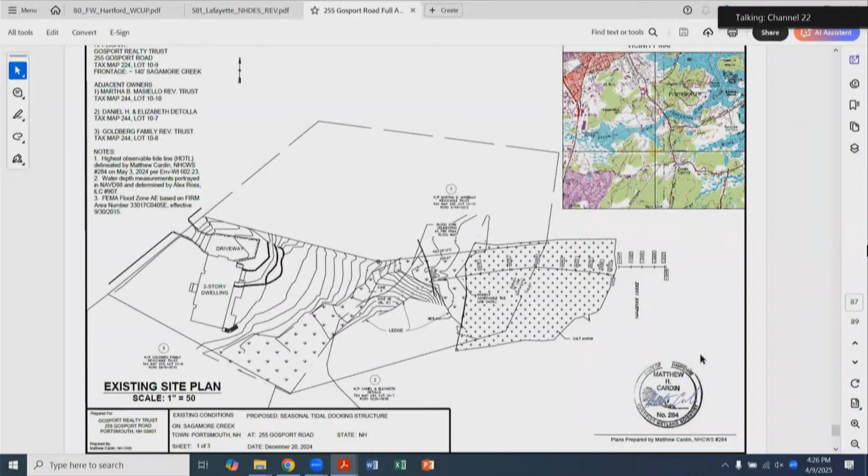Okay, everybody hear me okay? All right, good afternoon, my name is Matt Cardin. I'm an environmental consultant working on behalf of the property owner at 255 Gosport Road. This is for a standard dredge and fill major wetland permit application for a tidal dock located at the property. The property fronts Sagamore Creek as one of the properties in Gosport. There's currently no dock or any type of wharf at the property, so this is a new application for a wharf. The proposal is for a 6 by 200 foot permanent pier connected to a seasonal 30 by 4 gangway, connected to a 10 by 40 float on float stops or skids, and there'll also be a 15 foot by 6 foot ramp accessing the pier.

So the major wetland permit application is for impacts to freshwater wetlands and tidal wetlands on the property, and there's also a waiver request for the overall length of the structure. DES in their standard design rules limits the overall length of a structure to 200 feet. This goes beyond that in order to reach navigable water for the use of the pier.

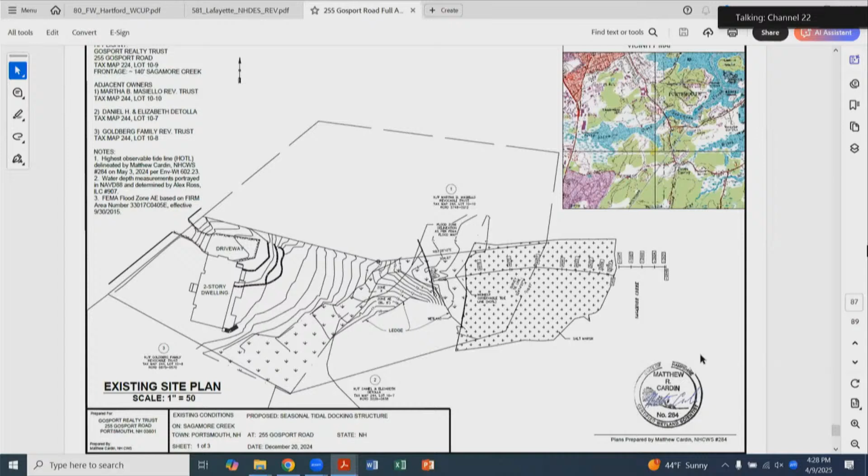So just going over some impact numbers. There's a proposal for impact to the tidal buffer of 55 square feet, a permanent impact to freshwater wetlands in the amount of 247 square feet, and a permanent tidal wetland impact of 969 square feet, plus a seasonal impact with the gangway and the float totaling 620 square feet. So that's in total 1,836 square feet of wetland impact, both fresh and tidal including the seasonal parts, and then 55 square feet of buffer impact.

To go over in detail - you're on the next page, beautiful. So the property has an existing dwelling on it. It's a typical backyard, maintained lawn, and then it slopes down to where the freshwater wetland and the tidal marsh extend from the property boundary out to Sagamore Creek. You'll see on the bottom left-hand corner there's a wetland drainage swale that crosses the property line, and then that freshwater wetland drains into the tidal portion.

So that's why there's impacts to both freshwater and tidal wetland, because from where the start of the pier is on an upland area, it traverses over a freshwater wetland portion, and then towards a tidal portion, where the highest observable tide line was delineated. It's fairly diffuse - there was no topographic change. It was really mostly based off of wrack line and vegetation species specific to a tidal marsh.

So you can see there's a rock wall there shown - that's essentially where the start of pier is. To the left side of that is the access ramp, and that lands on a bona fide upland tidal buffer. Then that ramp will get to the pier, and the pier extends 200 feet to the salt marsh, and then there's a gangway, and the gangway extends past the leading edge of the salt marsh down into the mud flat, where there'll be a float. There you go, that's a much better depiction of it.

There's a total of 34 permanent piles that'll support the pier.

As far as construction goes, access will be solely from the water. So all materials and equipment will be via barge, staged out, floated in during high tide, staged out beyond the salt marsh proper in the mud flat on spuds, and then equipment and matting will be placed - or matting first, where the dock will be, the pier - and then equipment will be traversed along that matting, and used to drive the piles.

It'll be sort of a boardwalk for construction workers to place the stringers. Once the stringers are on, everybody will be working on top of the superstructure to lay the decking and the rails and everything like that. So the goal is to get in there, drive the piles, put the stringers on as quick as possible, and then pull the matting out, and work will be done all from the decking of the superstructure.

The seasonal components will be floated in or brought in by barge and lifted and hoisted into place. So the gangway, 30 by 4, will be placed pre-assembled off-site and then placed in once the superstructure is built, and the same with the floats. Whether the floats be on float piles or on skids or kind of stilts is to be determined. I like to keep that up to the contractor, but potentially getting input from DES on that. It's written up both ways - shown here with float piles or float stops.

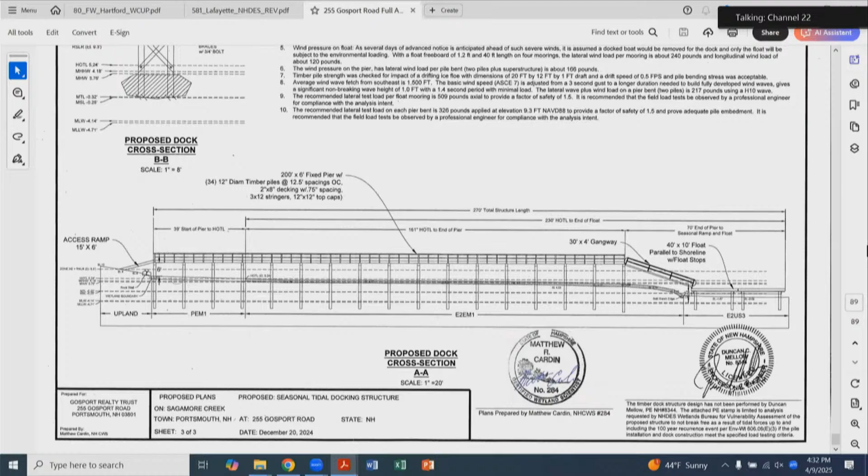Some other details of the application - going through the requirements of coordination between the Port Authority. We have a letter in the application from the Port Authority saying there's no adverse navigability impacts with the proposal. Additionally, there's correspondence from the Natural Heritage Bureau in there. So there were no hits from Fish and Game, but there were a number of rare species that came up in the Natural Heritage Bureau report, so there was correspondence back and forth with Maddie on that.

That's the microphone.

And there were some natural communities: high and low salt marsh, intertidal flat, and salt marsh systems. And then there were also 5 endangered species listed, so there was correspondence back and forth.

There was a survey done by myself out there looking at glasswort, marsh elder, and a total of 4 species, including salt marsh agalinis, a flower, and tundra alkali grass. The agalinis was determined, from my assessment, to be known to occur in salt pans, and there's really none where the impact area is. It's pretty thickly vegetated with different types of spartina and glasswort on the leading edge.

And then the alkali grass - talking to Maddie about it, there's a historic presence about a half a mile away. Describing the site to her, she felt pretty confident it's unlikely to be at that site. So I think we've done solid due diligence reviewing for rare and endangered species, and Maddie's feedback was to try to reduce the overall impact on the salt marsh, which I've attempted to do in the design.

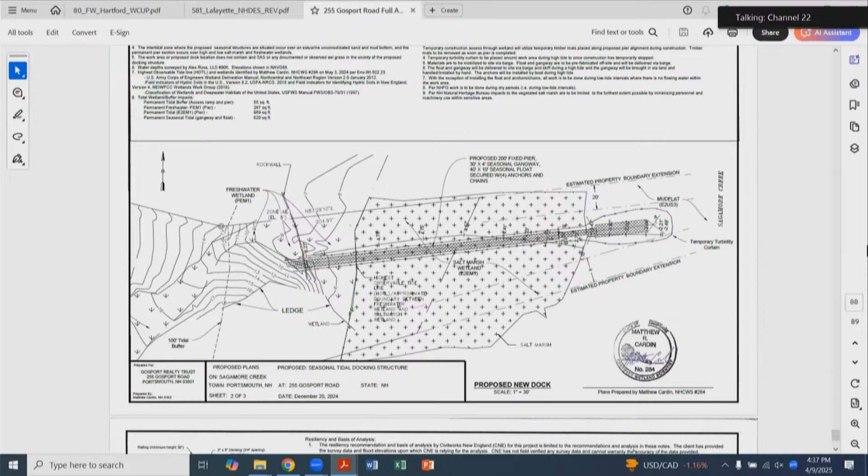I wonder if you could just talk a little bit about how this dock is going to be used. This is just a single family - what kind of activities do they anticipate doing on it, and how are they going to get down there? Just talk a little more about the use.

Sure, single family lot - a single family currently owns it, with young kids, a fairly young family. Permanent, full-time residents - yes, a local family.

The anticipation, from what I understand, is to have a boat down there and be able to access the water. They have a technically waterfront lot, and I think they're relatively new to town, so they haven't had too many seasons down there, but they have visions of bringing their kids down and being along the water. This is a means of getting them past the salt marsh, in an elevated sense, down to the water where they could access a relatively small boat. In terms of getting down there, there's sort of a footpath already to get to the salt marsh area, but nothing official.

Right now, the footpath kind of goes through the skinniest part of where the wetland swale is, and it's shown as a jurisdictional wetland. It's really more of a drainage conveyance. There's not a lot of wetland characteristics in terms of typical wetland plants, organic soil, and very poorly drained soil. It's not so much that, it's more of a conveyance, but it wasn't so much a stream, it was more of a wetland, so that's why it's shown as such.

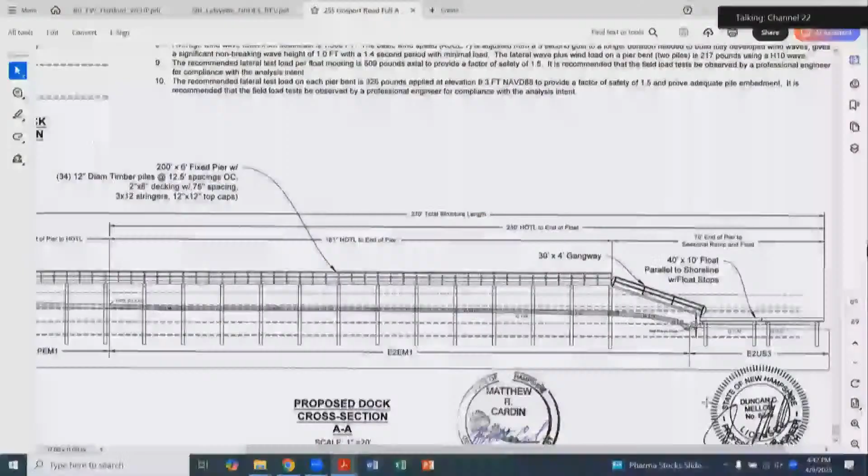Having a smaller float wouldn't eliminate the need for the waiver. No, but having the longer one doesn't get you out into any deeper water. Correct. But it does allow more boats to be moored there. You'd have 2 slips, almost 4 slips, since most boats are 20-ish feet. A slip technically is 25 feet according to the rules, so almost 4. Yeah, you're maximizing the allowable use of the structure by having a larger float. You could put more vessels, one on each side, possibly fit 2 on one side. But yeah, you are maximizing the use you get out of it.

And at this point, you don't know what size boat they're going to put there? No, it's going to be limited... I shouldn't say anything, this is sort of my opinion, but I don't know.

My concern about the size of the float is about the possibility or the need for other boats to come up there, because we've seen it happen, and I live by the water. Someone says 'Oh, I don't have a mooring, can I be on your float?' And then it becomes a permanent thing, and 3 boats end up being there permanently.

Can you say that again? So you're saying other people in the area come nearby? Friends will ask, 'Oh, you have a dock, can I moor my boat there? Because I don't have a mooring.'

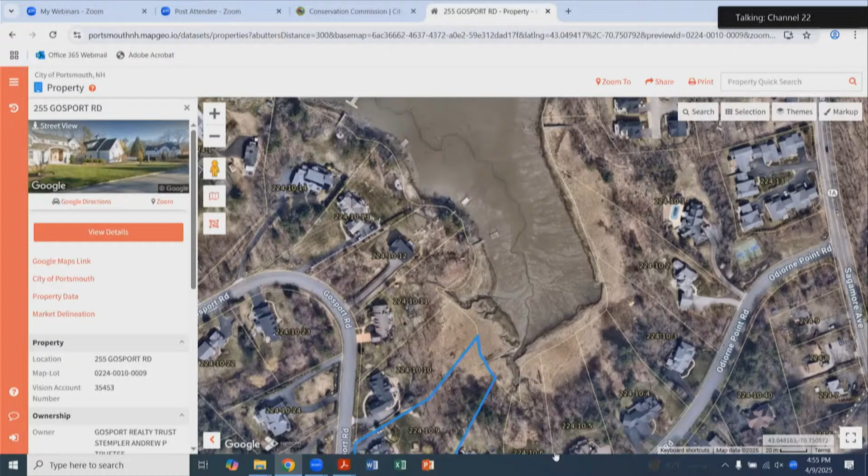Matt, I had a question about what you said about the access and the hours of access. Did you analyze or figure out what would the access be if the dock was 200 feet or shorter? How many hours compared to the 16 hours, I think you said?

Well, where the floats are to get to the mudflat portion, which is really the navigable portion of the water body, we can't move it any more in, we're as far out as we can go. It's a substantial area, and once you get to the mudflat, it's relatively flat, so moving it further out, or even bringing it in by a foot or two, isn't going to make much difference. Like any typical salt marsh, you have the vegetated portion, and then there's a pretty abrupt drop down to the mudflat, and the proposed floats are just offset from that transition.

So moving that isn't going to change it much. And then I tried to get the longest gangway I could without running the risk of the gangway hitting the mudflat, to try to reduce the amount of pier. So within reason, you want a little bit of space because of some tolerances there, but I've tried to make the pier as short as possible by getting to a float that's as tight to the mudflat as possible, generally trying to reduce the overall length of it, given the site constraints that we have.

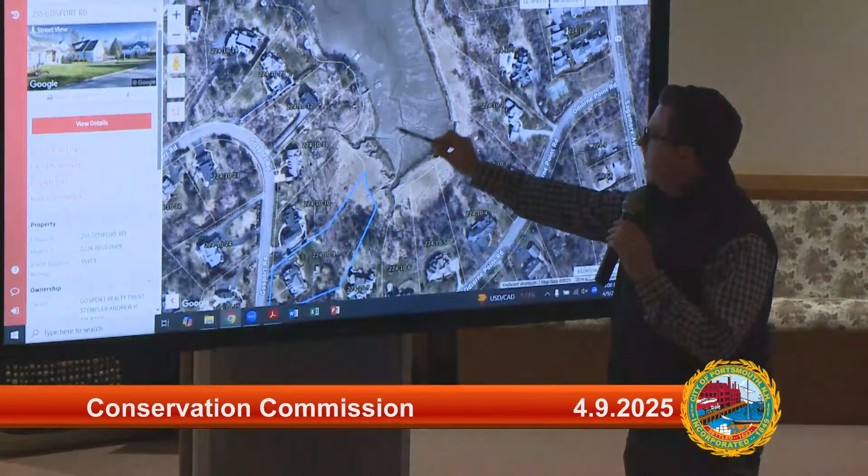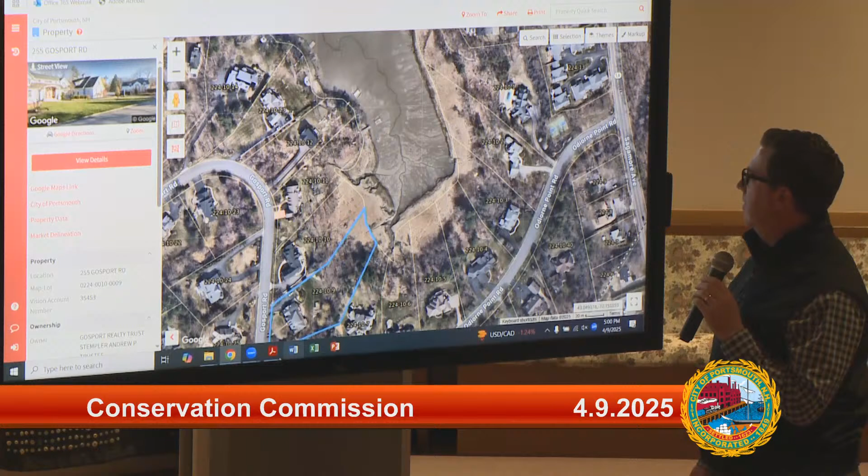This is our property. This extends generally this way, this extends that way, and then this extends out here and out here, and eventually they all do converge. But where we're proposing the float, generally somewhere here, they don't converge. If you go back to the plan—here's the property boundary, here's the 20-foot setback. Where they do converge is far out in space here. So that ended up not being an issue, but I certainly respected the comment.

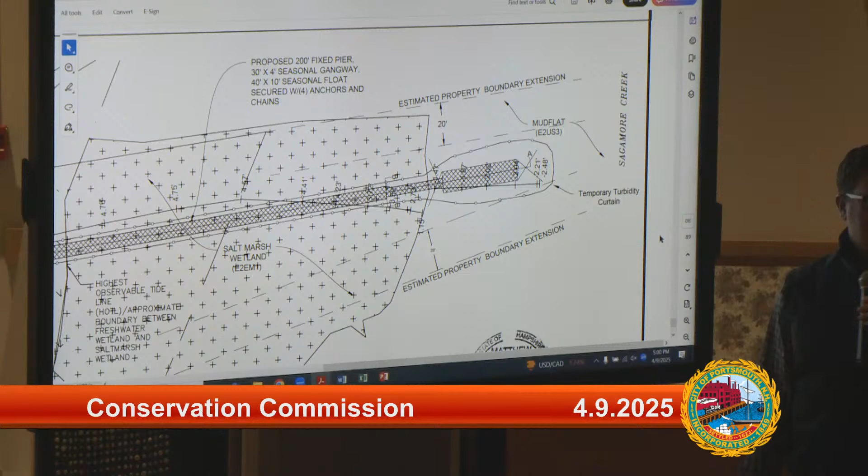Okay, thank you. Yep.

Obviously this is extending well beyond their property boundary. I actually don't know who owns that marsh—is that city, is that state? You see their boundary does not go all the way to the water's edge. I don't know—can you provide some insight? So it's generally owned by the public.

There are a couple of things happening. For waterfront property owners, the State of New Hampshire generally has a charter agreement giving waterfront property owners a right to wharf for properties with frontage on public water. But through that process and DES's rules, they acknowledge it's considered public property, which is why they have these design standards. A further level is you go through the PDA, Port Authority, and they weigh in on its impacts and effects on navigability. There are other rules in DES's regs addressing potential impacts on public navigability—like you can't have a sheer wall, it has to have piers and allow flow if somebody needed to pass through for safety reasons.

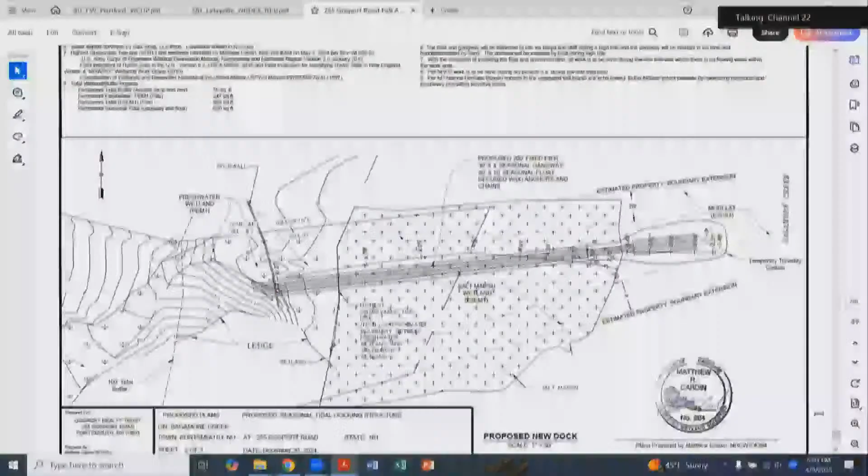Just to make sure I'm reading this correctly, the orientation of the dock is basically east-west, right? If you scroll up—yeah, north is up, so yeah. I think it's worth noting a north-south orientation minimizes the amount of shading underneath the dock, which, obviously you were constrained here on what you could do, but it's worth noting as one of the downsides of this particular design.

Yeah, you can see we didn't have a lot of flexibility—even if we had that option, it would have been a great point to consider, but the design constraints are pretty tight in terms of how far you have to go to get to navigable water, and your latitude within the property. You can move within those 20-foot setbacks, but that requires getting an abutter sign-off, which I don't know would have been an issue, but it didn't seem advantageous to go one way or the other in this case.

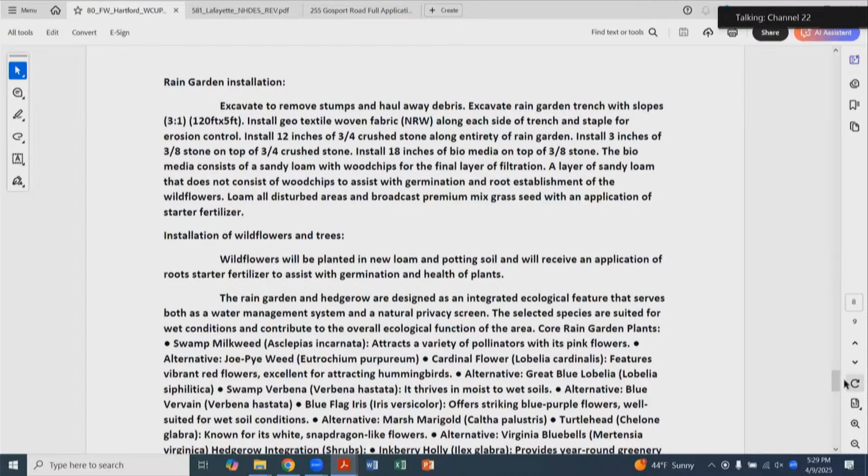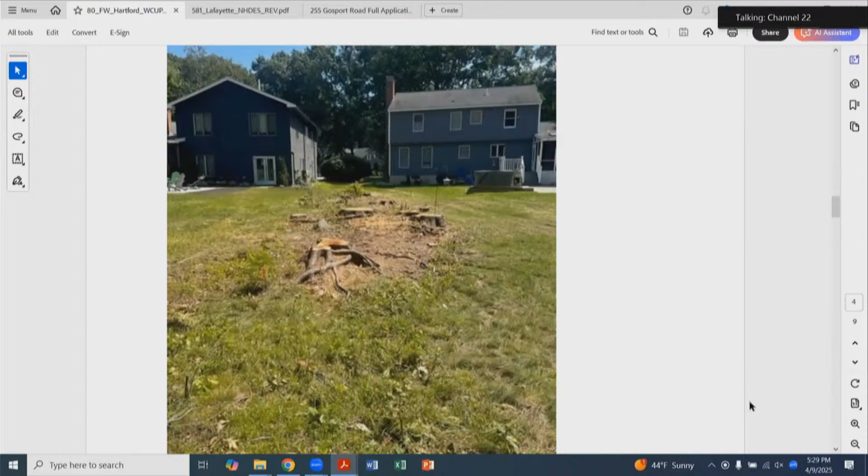So we took down, like I said, 4 trees. You all can do math - obviously that's a lot more than 4. This is tied into our neighbor, Ash, at 90 FW Hartford.

And kind of where this got a little sideways is, so obviously you can see aesthetically not pleasing whatsoever. We removed all of these. If you now scroll down, you can take a look at the standing water that we have. These are all kind of recent, and we haven't had that much rain.

In working with Kate and working with Peter, as we understand it, if we were to grind these stumps, we do not need to be in front of you all today. We are not interested in doing that. I would like to excavate these out and put in a rain garden of sorts. I'm not looking to build a structure. This would be all natural.

We're working with an individual - I apologize, his name is Alan from Northeast Landscape. He couldn't be here today. We can call him on the phone if need be. But he is kind of a true subject matter expert. He originally, he's done one of these for Lonza not too long ago.

The point that, again, I would like to stress, I'm not looking to build any type of structure. This would be a natural way of diverting the water. And obviously you look at this water, we're very worried about my kids - they were at one point trying to paddleboard back there. I was worried they were going to drown in that. But more, I say that half kidding, more like mosquitoes and everything else.

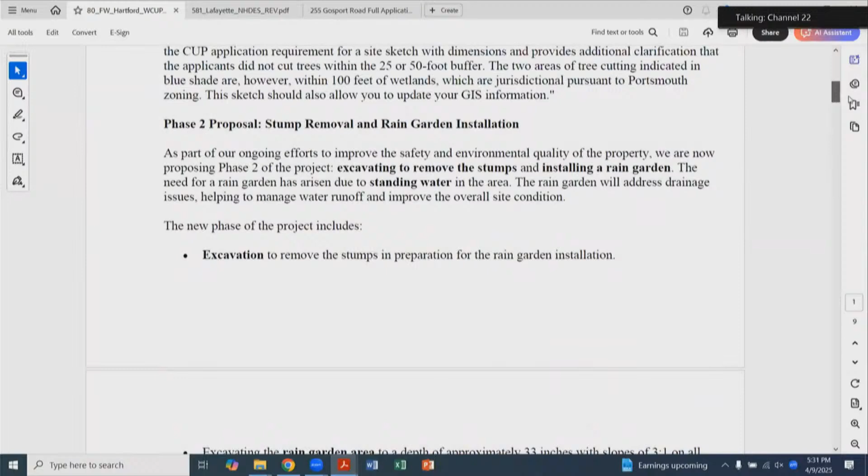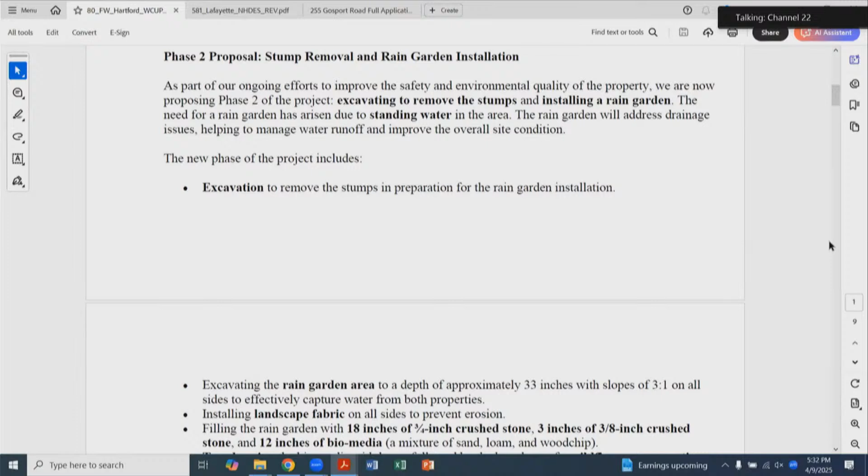So if you scroll up, those were the trees that we worked with Marc Jacobs with. If you could go up a little bit more, there should be some type of detailed information in terms of how he is suggesting doing this. It is a little bit of an iterative process with him - we'd have to start this to identify exactly what this would look like. The first step would be testing the water tables to see if this is even remotely possible.

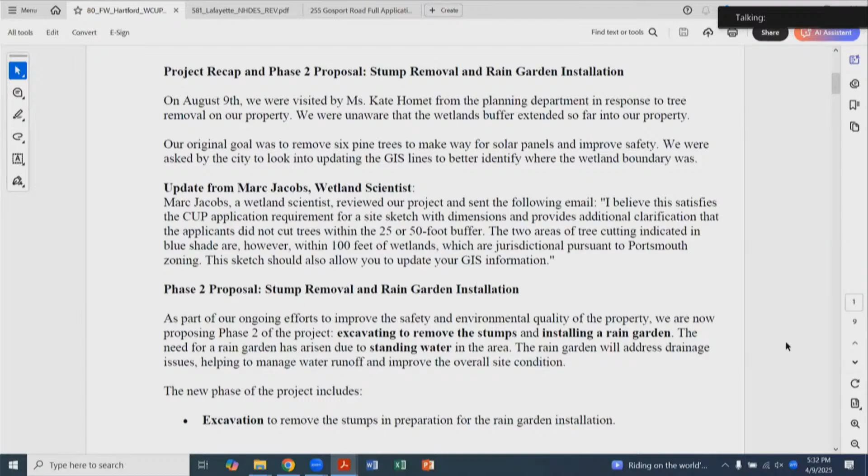Steve, you have anything to add? No, I'm just, my wife and I are concerned with infestation of bugs. The water, probably 6 months of the year, sits in that culvert area.

So the proposal that Alan Pearson is making, and he's done it before, is to do a rain garden, which my understanding, this area is approximately 150 feet from the start of the culvert back to the wetland area in the back of the property, and about 15 to 18 feet wide. So they would excavate, slope both sides, make it into kind of a dry well for the full length, put in stone and fill in the bottom part, and then add fill to the property to make sure it's draining away from the house.

In the springtime, correct me if I'm wrong, the basement at 80 Hartford is 3 or 4 inches of water in the basement and has to be pumped exteriorly. And right now it's sitting in that culvert, so the back part of the property is wet. So I think this, although it's more expensive, certainly about 3 times versus just grinding the stumps, it's a worthwhile project. It would not just beautify the property, but with absorbent plants help to mitigate the rain that stays in the property, about 6 months of the year.

Yeah, exactly right. And then I'll stop with the sob story here, but Steve's absolutely right. This has exacerbated the water that's coming into the house. The sump pumps are running nonstop. And then, yeah, obviously would plant any trees and native species.

Yeah, exactly. There's a pipe? There's a culvert. Is that what you mean by culvert? Like an underground pipe?

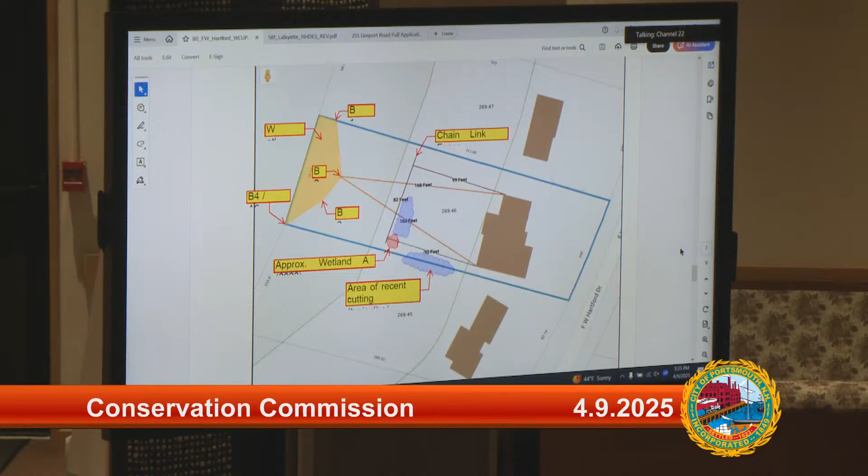No. When you say culvert, the only piping that would be there would basically be the piping running from the gutters. But no, you're digging down 4 or 5 feet, filling this with crushed stone, then putting soil on top of it, and native trees above that. Probably not the right word.

No piping, okay. All natural, and then from the gutter to that area it would be like a stone swale. Is that what you're picturing? Yes. Okay, just making sure I understood. No, I appreciate you articulating that.

Thank you. Wait, what is the other area, the other purple, blue? The other blue is where trees were.

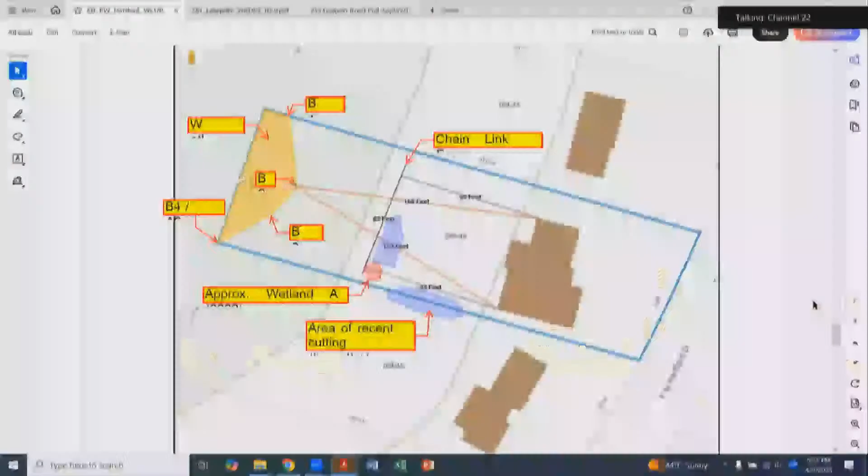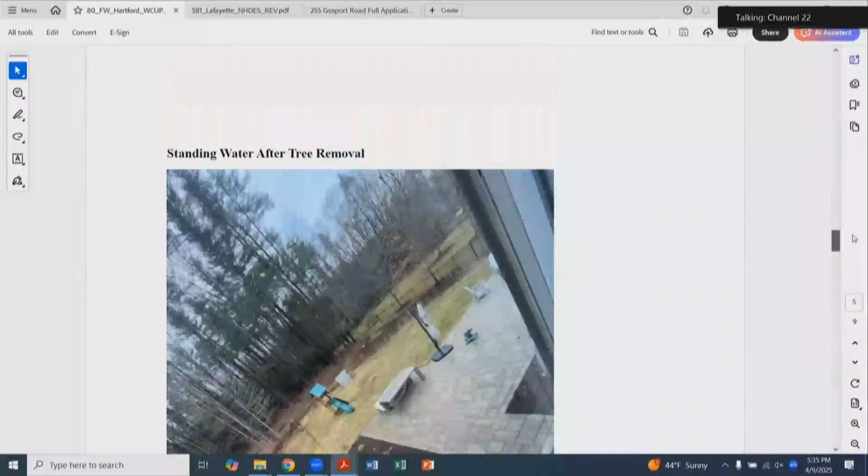But there's also water. That's when, if you scroll down, you see the two, right? I thought one of them was actually a video. Yeah, so you're seeing it here, and then all back here.

But you're not doing anything in that back area? As I understand it, it would be pitching it back, but it seems to be the majority of this water is all runoff from over here and going that way, because that was never a problem before.

So you didn't get standing water when the trees were still intact? No, ma'am, nothing like that. We had, to be fair, some water in the basement, but no standing water.

And these pictures, in some ways, do not do it justice. Like I said, the kids were literally paddleboarding. A nice little skating rink in the winter, maybe. If it wasn't for the sump pumps running continuously, it could perhaps be not quite waterfront property like the last gentleman who was up here, but yeah, you could do something.

Yeah, I mean, the trees are really powerful, right? Because they're constantly sucking water up into the atmosphere and releasing it. So a rain garden isn't going to be quite as powerful as that group of trees was, just to keep expectations in check is my thought.

Understood. This is exactly why this committee does what you guys do, without question. I had a question, it wasn't entirely clear to me.

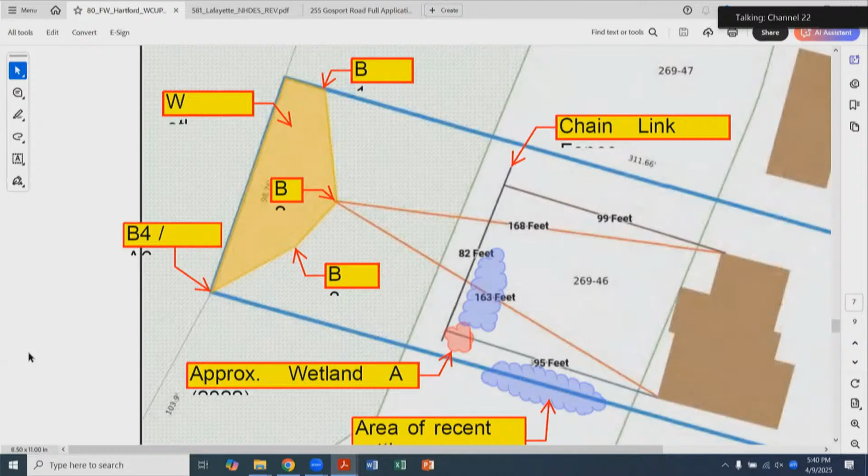So 100 feet from that would be the new buffer, which isn't shown on there, I don't think. Based on other measurements I see, it almost doesn't even look like that area is in the 100-foot buffer. I think you're right, on the trees. But I wanted to make sure we were covering all our bases this time. As I understood it, if we were to grind or excavate the stumps, we would come back in front of you, but yes, I think that specific area, you're correct.

I think it would just make it easier to know exactly where this rain garden is proposed, because if it goes further past where the stumps are, back by Ash's shed, at that depth into your yard, you'll have more impacts. Without a plan with the exact location of the rain garden, it's hard to tell where the buffer impacts will be and where you'll be right outside the buffer.

And it sounds like you can't defer to Alan, and it sounds like he can't either, as I understand it - he's the one who's been to the house multiple times, and he needs to test the water tables. But yet I don't want to rush it. Brian's absolutely right in doing this correctly.

It's not the best situation between Ash and us, in terms of we're incurring the majority of all the cost of this, and it's just something that we're a little time sensitive about, in terms of how much patience we will have with it.

Inside the fence is controlled space, as Sam mentioned, which involves keeping the public from traversing it and destroying the fields. There are also ticketed events requiring admission. So the school department did not want us, or allow us, to put the path anywhere else. As you can see, there's no way to avoid this impact. Given the property line and the fence, the only place to put the trail is where we have it. So hopefully that answers the avoidance and minimization question.

In regard to the comment about spanning the wetland with a bridge, this is not a trail.

It's not a sort of a walk. It is an access that needs to be maintained for access in all seasons. The intent of the school department and the width that we created is so they can drive plow trucks and keep that operational in the winter during snowstorms. And that's not the kind of thing that is a boardwalk.

We could appreciate boardwalk designs, but those are not designed to have vehicles with plows on top of them, and that would extend the cost. But also the school department is going to be taking this over, and long term they do not want to maintain a bridge, so to speak. So I hope that answers, gives you more information, but I'm here for more discussion, and we hope that you just write a letter in support.

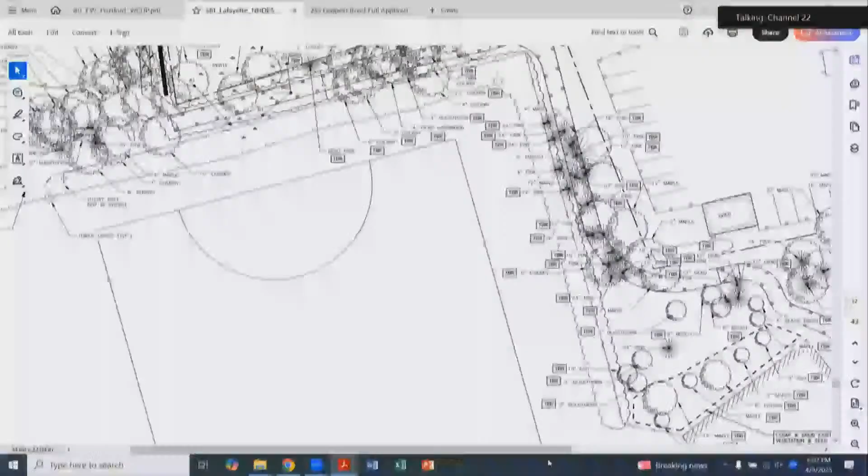I don't know if you have the whole plan set, but what I handed out shows you the trees being added. There's a row of trees that's going to be added on the back side of the church parking lot, going up and down - those are all the new additions. And then there's an area to the south of that that currently has a lot of trees that are in decline, some from bittersweet, and some other invasives, so the invasives will be taken out. There's a 24-inch pine that's going to be saved, but the other plants are all proposed.

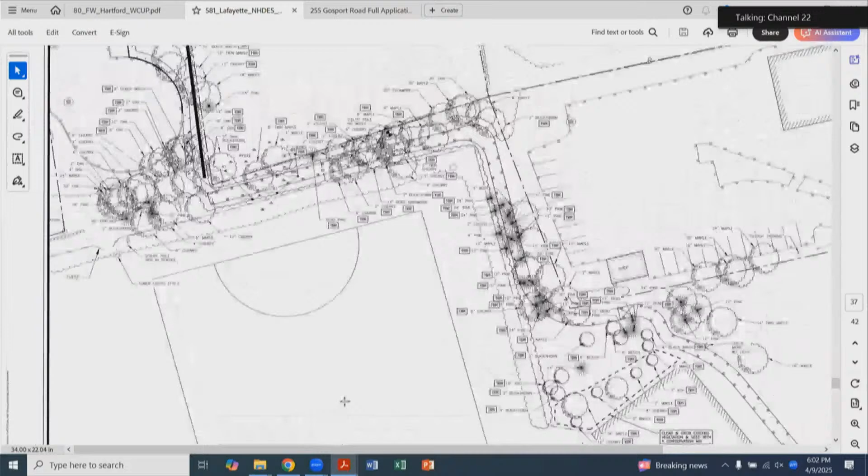This just is the removal plan. This is not the plan that shows the landscaping - that's the one you have there. That's the landscaping plan. So you see the circles? Those are proposed plants, the new additions. So this plan, the first plan, is trees to be removed. This plan is what is proposed - trees left over, and trees to be planted.

So that's what the landscape will be. Both what's going to be left and what's going to be added is shown on this one that was handed out for us. Does that make sense? Okay, yeah, that's helpful, thank you.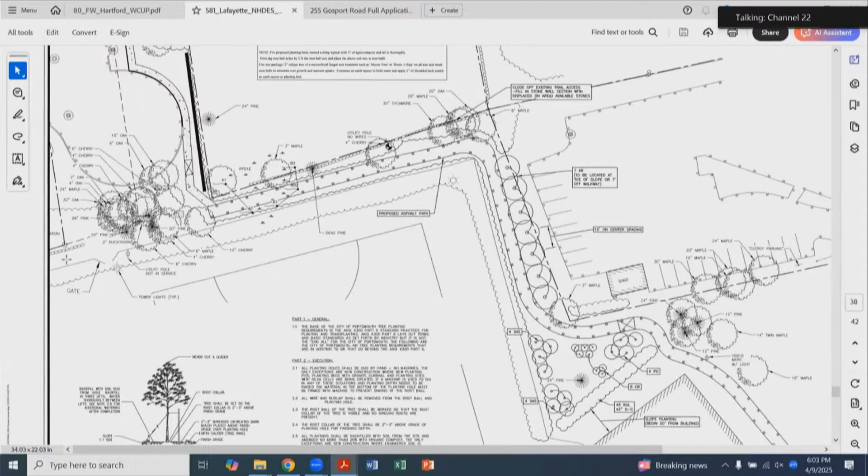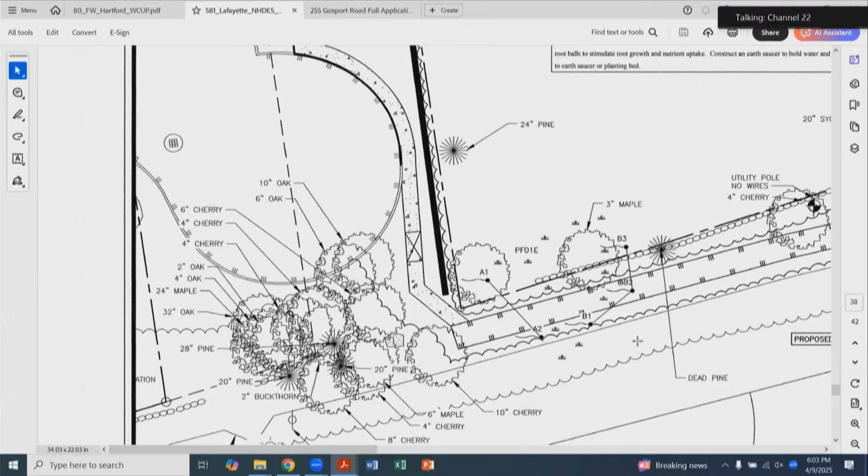Can you show me where the wetland is? I don't have a plan on the proposal I have showing the wetland. Is it off of the circle? Because our purview for this is specifically that wetland area, correct? The fill is right here, yep - that's all we have. It's 600 something square feet, I think, of fill that's proposed.

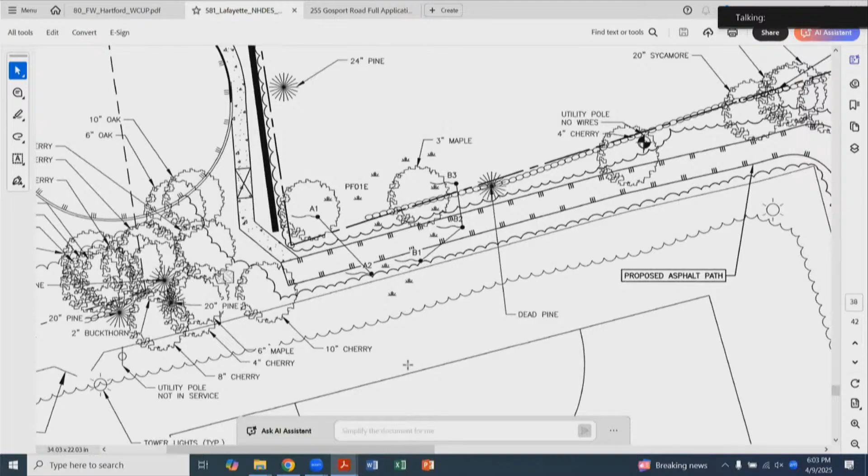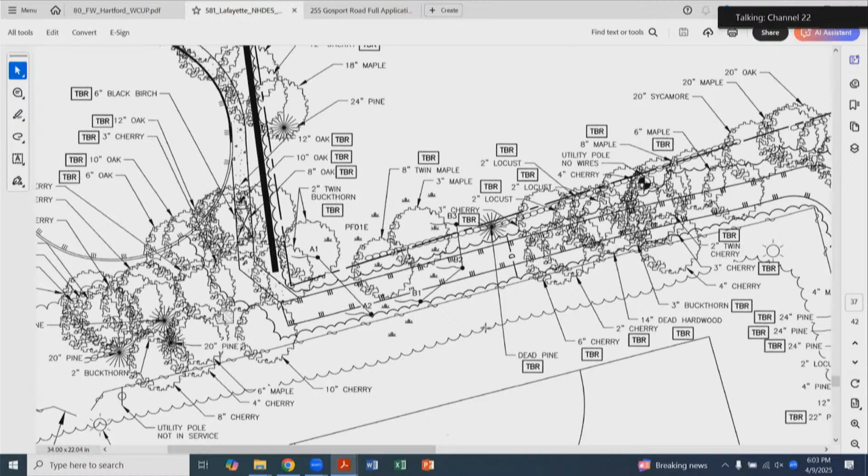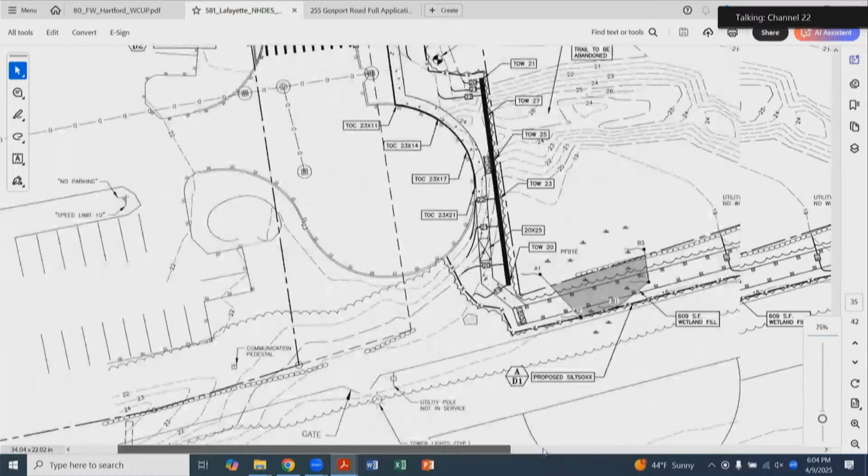So if this is the existing conditions plan, it looks like probably there will be fill here and maybe one tree removed from the actual wetland, or two. That plan shows you the wetland impact area shaded gray - it's 609 square feet.

And it's not big enough to have a buffer that is jurisdictional, correct? So it's just the wetland here, and that's why DES gets involved, right, when it's filled.

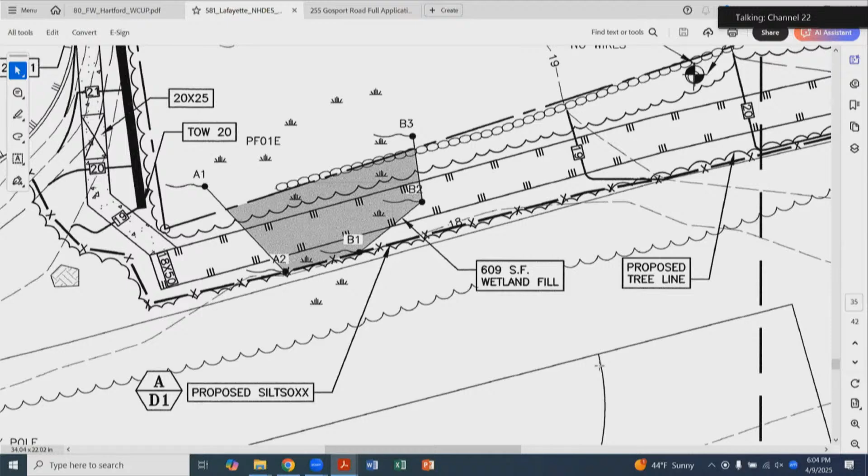I think you already answered this question, but I'm just going to ask: is asphalt because of the intention to plow why they didn't consider making it some other surface? Correct, yep.

Let's follow up to that. So winter maintenance on that area is going to include plowing. Is there salting? Do you have a winter maintenance plan somewhere? We don't, because that would be turned over to the school department for their maintenance. So the job at hand for us is to build it.

Yeah, that's a problem, huh?

So could you put that in notes somewhere or whatever? Like just in the plan notes? Just so somebody - I think you would make a recommendation, I guess. I mean, I can't...

...bind future conditions. Mr. McNabb is building this off-site improvement to satisfy the condition of a planning board approval for 581 Lafayette. He's not going to maintain it. So to put things on the plan regarding maintenance - there are some notes about maintaining the planted material so that it takes, but beyond that, he's not responsible, and we wouldn't want to put things on there without the school department's blessing.